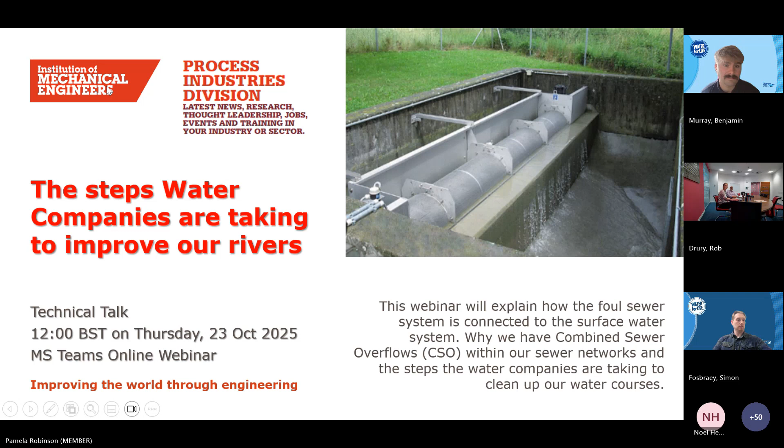Sorry, just trying to find my mouse. I'm over here now, yes. Right, there we go.

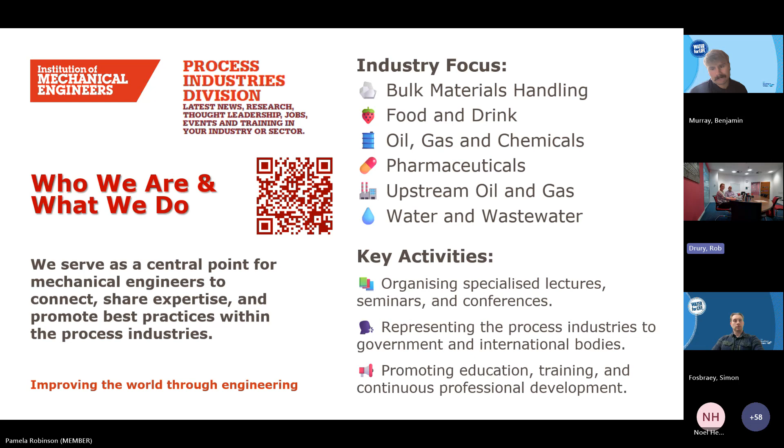I am Pamela Robinson. I'm a chartered engineer with the Institution of Mechanical Engineers. I'm a senior mechanical engineer within United Utilities. I've been here for about 3.5 years now. And with me today, I'm joined by Rob Drury, who's our Better Rivers Capital Delivery Director, also at United Utilities. Rob previously held a series of influential roles on some of the world's largest and most complex and challenging projects. Rob has worked in multiple business sectors in the construction industry, namely oil, gas and chemical, aviation, rail, pipelines and telecommunication, both in the UK and internationally. But here at UU, it's part of project investment of over £1.5 billion to be spent over 5 years, improving our CSOs.

Joining us today is also Ben Murray, who's going to do some presenting for us on storm overflows in the Southern Water region. He's been with Southern Water for the past 2 years, working in this particular area. He's driven by a strong passion for environmental protection and community engagement. Ben plays a key role in raising awareness of our efforts to reduce storm overflows. He regularly delivers information talks across the Southern Water region, helping customers to understand the vital work being done to their environment and their waterways. And then joining us later as a panel member is Simon Fosbraey, who's also from Southern Water, and he's a senior storm overflow engineer.

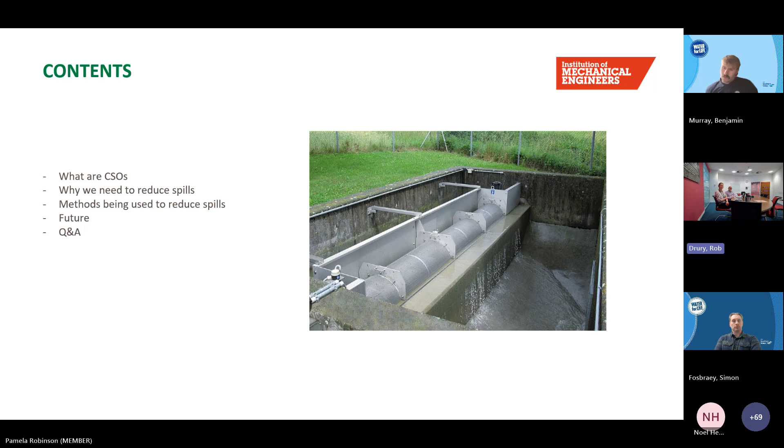Now on with the webinar itself. First of all, we're going to describe what are combined sewer overflows, CSOs for short, why we need to reduce these spills, and the methods that we're taking to try and reduce these spills. We're going to discuss the future scope that we've got, and then we'll do all Q&As at the very end.

However, we also have a lot that are cross-connected with surface water drainage, and this is fine up till a point. However, when it rains, the combined sewer only has a certain capacity. And then as it rains further, we need to have a pressure relief point, and that's what a combined sewer overflow is. It's a pressure relief point.

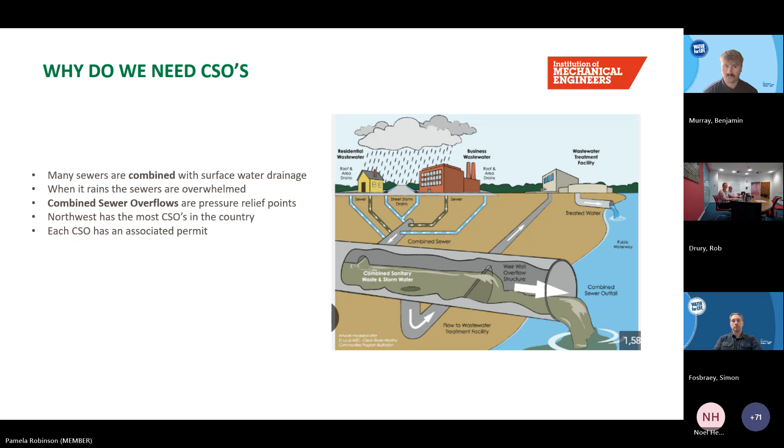If we didn't have this pressure relief point, the sewer would back up into our homes, pop manhole lids, and cause flooding for our residents and industry. We need to have this pressure relief. Each of these CSOs is a permit, an agreed permit with the EA, and it's an agreed discharge point, with most of these combined sewers.

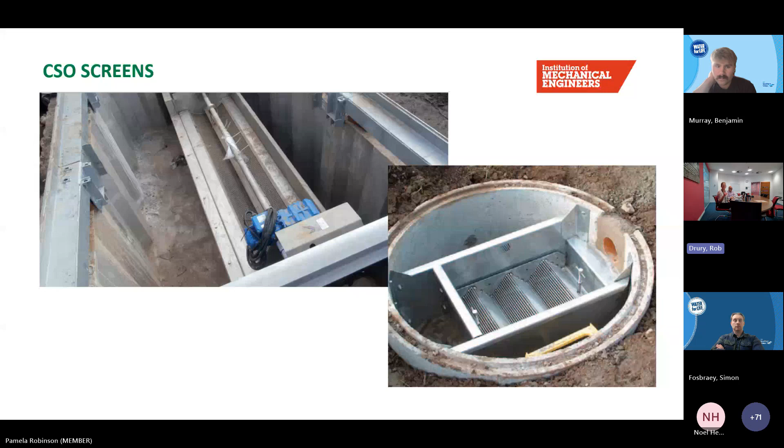Over on the left-hand side is a powered screen alternative. The flow coming through the network you can see on the right-hand side of the picture, and then as the level rises, the storm comes up through the bottom of the screen and out on the overflow on the left-hand side. That's the storm discharge. The screen has a little wiping mechanism that continually wipes it clean so it can carry on screening, and flicks the screenings back into the continuation flow, which then goes to the sewage treatment works, where the screenings are taken out.

How we're looking to reduce the spills, because we have many CSOs across the country: we're modelling all our networks to a 2050 design horizon, including climate change, to work out where we're spilling and how frequently, so we know where to prioritise and hit the highest spillers first. We're looking to get the spill events to less than 10 times per annum from that spill point.

The methods we'll try and prioritise: can we reduce surface water entering our combined sewers, so that a rain event doesn't impact our sewage pipes? We're looking at reducing infiltration of existing pipes; some are really quite old now. We're also looking to build in storage, so when there is a storm event, we hold the flow back in a tank or some kind of storage, and when there's capacity in the network, release it back in.

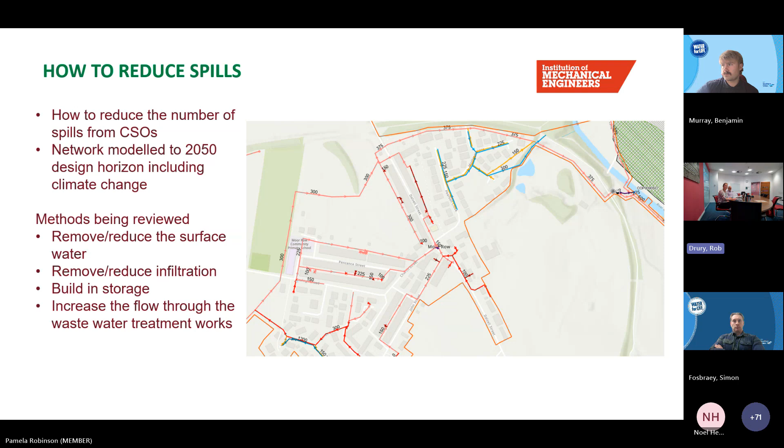Okay, afternoon everybody. I'm going to touch very briefly on various examples, some theoretical and some real life, and I'll try not to overlap with the content the guys from Southern are going to cover.

Now, that brings its own challenges of deploying at huge levels of scale. It can be done with larger premises, at large commercial premises, where again it's more successful. But generally, the rollout of this kind of thing at scale is particularly tricky, because we're talking about hundreds or thousands of customers, but again it all contributes. So the less we can get into the system, the better, and the lower volumes of water that we have to cope with within the system.

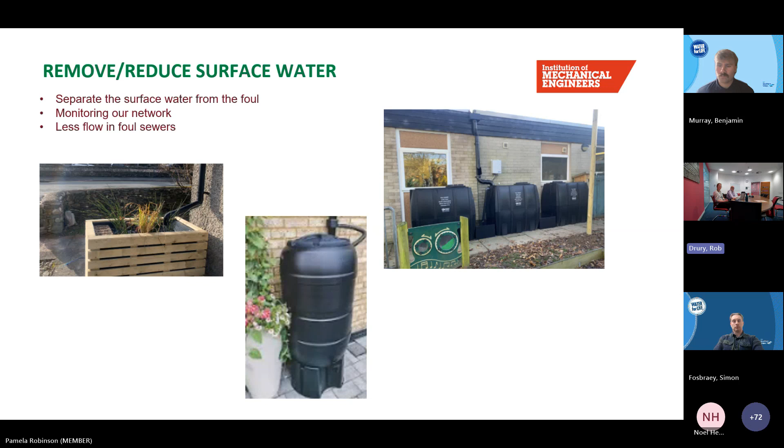And then we've got, as people like to call it, SUDS, so sustainable urban drainage systems. And again, these are real systems that you're looking at on the screen. That's in Altrincham on the left-hand side. So again, for the people that are not familiar, you think, oh, well, the local council and local community are installing tree pits and the like. And really, these are all systems that, again, prevent that rainwater getting into the system.

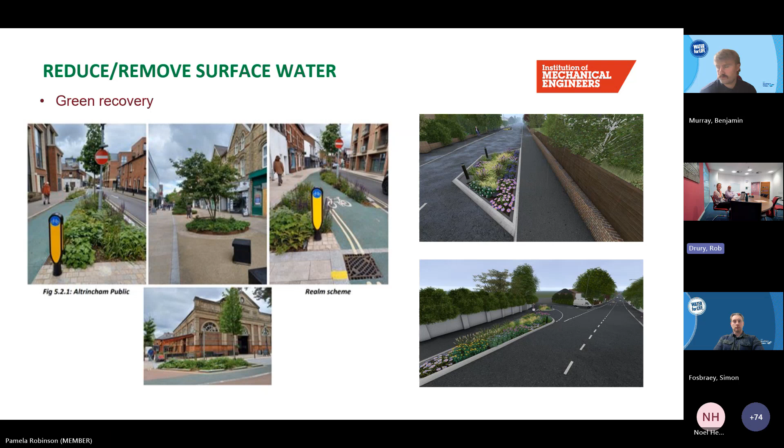These are particularly difficult to go and install because it's much easier to go and do work on some tanks in a brownfield site. As soon as you're into communities, it depends on what the community is and the appetite for traffic calming and the associated stuff. So again, difficult to get going and difficult to start, but again, very visible and a real positive in not allowing rainwater into the system.

And then this one isn't ours, but again, it gives you an idea that within these huge networks that we've got, by really automating the system, I'm going to say in probably a petrochemical kind of a way, there's an opportunity to use existing capacity within the network. So, typically we've got huge diameter pipelines that interconnect across counties and regions. And by automating the valving and the pumping and having that a little bit more sophisticated, there's opportunities to create hundreds, and in some cases thousands or 10,000 cubic meters of storage within the network.

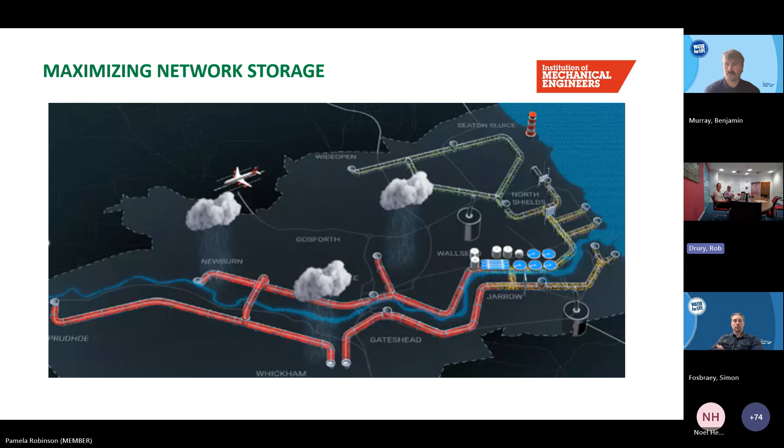So again, that's about maximising what we've already got. Almost in a sort of use Thames Tideway as an example of how that would work. But again, it's how we prevent building new and maximise the sophistication of the old.

And then we've got the here and now. So this is one of our signature projects right now. So we focus right back into more traditional construction. This is a 12,500 cubic metre tank that we're building up in the Blackburn area. And you can see the scale of the excavator in the middle there. And when all else fails and we can't prevent the ingress of water into the system or the network, and we can't fix it all with SUDS, we really are forced to go and build huge levels of storage.

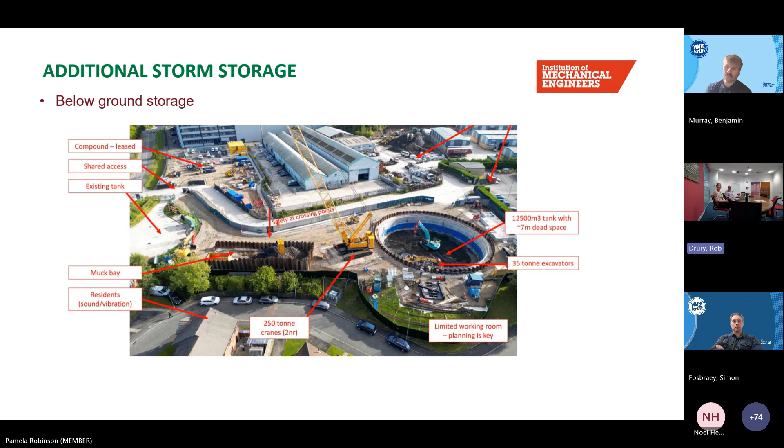This is one of our bigger systems, at 12,500 cubic meters for a tank. This is on some of the bigger sizes. We have bigger, but again, you can see. These are not typically easy to build. You would never choose where to build these. They're always in places that you wouldn't really want to build. Actually, this is probably one of the better ones. We have some incredibly constrained sites. But again, you can see the magnitude and the variance between some of the things we were looking at before and the underground shaft type arrangements that we've got.

And then we've got above ground storage, which, typically if we're looking to do work on an existing wastewater treatment plant, is often more viable because we've obviously got development rights within the actual site. Again, the visual impact and just the physicality of some of the tanks that we have, you can see the impact there.

And again, that is all about the aesthetic treatment of the site to minimise the visual impact. This is a site in Lytham, and again, it's next to an existing pumping station. It's next to a commercial site. If you look on the far right, there's a big commercial semi-industrial estate. So again, a better opportunity to go and build something that's more industrialised.

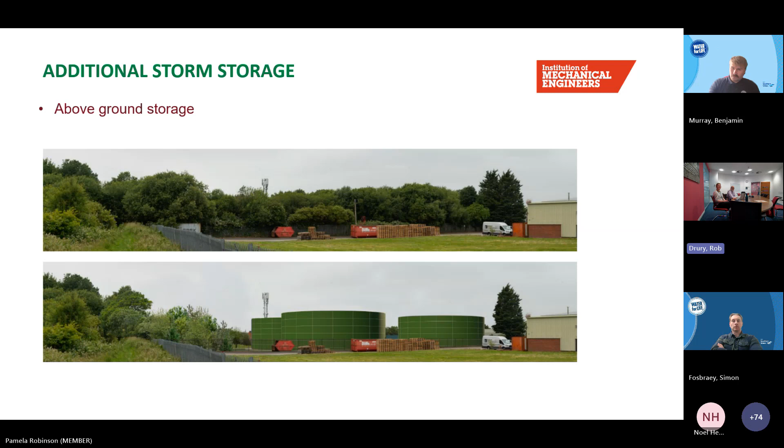And again, we have others that are right adjacent to schools and communities. So the impact of that is just not possible, and we would then be forced to go to something like what you saw on the previous slide with the underground tanks.

And then we've got a scheme that we've been talking about for a while. This was something that was badged as the Fylde Tunnel. So again, much similar to Thames Tideway; most people are familiar with that and the documentaries that exist. So rather than constructing individual sites and individual tanks and individual network enhancements, this is really about stitching together all of those sites. This was a scheme that stitched together potentially 19 CSOs and also some emergency overflows.

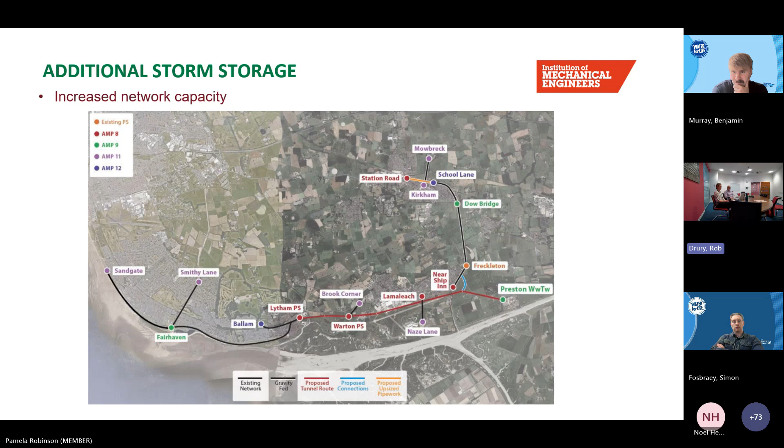So really quite an elegant solution, and we have also been thinking about the local community. The disruption is really minimal because it happens over a relatively short period of time rather than going from AMP8 on to AMP9 and 10. So the disruption is less, and the tunnelling is less because we're doing it over 3 or 4 tunnel drives rather than building lots and lots of tanks. So a much preferred option, but it can be a huge capital investment. So while this is a bit of an adventure and takes a fantastic picture, it can be an extremely expensive solution.

And then we've got another very basic one where we talk about online storage. If you think about how we upgrade sections and pipework, sometimes it's as simple as going from a 24-inch main up to a 36-inch or a 42-inch main. This is where we're utilising a culvert. In this case there was a 16-inch main that we then expanded into a culvert. We run a box culvert down an existing easement, and the easement has got a dog leg in it, so we dog leg the culvert around that as well. So it creates additional capacity within the network, and we would badge that as online storage. Very unsophisticated, but very, very effective.

We have a lot of this up in Cumbria, where there are very small areas with huge access constraints. You'd really be looking to get nothing more than a Hilux pickup on some of these roads. So getting plant, equipment and materials is a real constraint. Building it becomes the easy bit; getting to the site and the access is probably the real challenge.

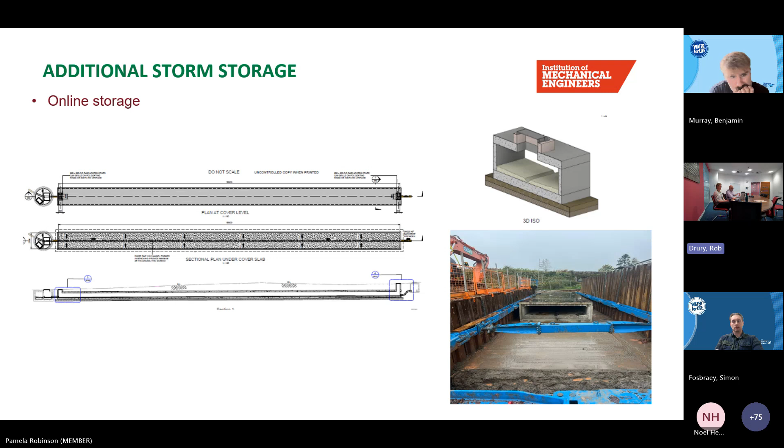And then we've got increasing the capacity. Where we have situations where it's all about balancing the best possible scheme, sometimes it's easier to increase the capacity of the existing treatment plant. We've done this particularly for low capacity sites. These are modular pieces of equipment, basically a modular treatment plant, a side stream treatment plant as it's called. That takes what might be a 5 litre per second facility, and we can add another 5 litres per second, so we can maybe double the capacity of the treatment plant to deal with all flow. It doesn't provide storage, but it treats more.

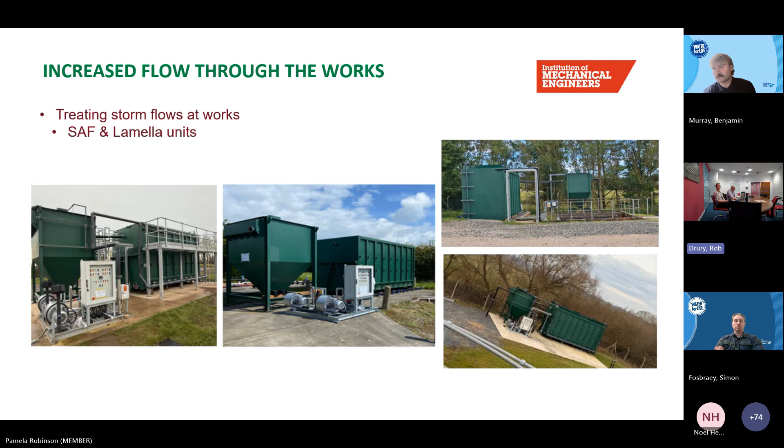These are particularly useful in the areas of Cumbria, where we have lots and lots of very small sites with very low flows in very spread out communities. It's just not viable in the centre of Manchester and the like, because the flows are huge. So this is particularly tailored to low flows, and from a rapid deployment perspective it has been quite a speedy and successful solution.

And then we've got wetlands. We have examples of this, where we're able to be very, very green, something that we would prefer to do more of. There are discussions with the EA and Ofwat about how this becomes a much bigger deal, probably later in AMP8, but certainly in AMP9, which will be 2030 onwards.

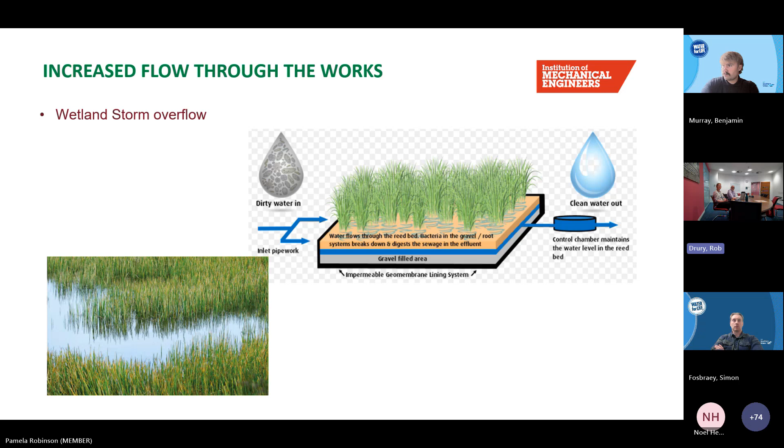So again, rather than going through process and going through huge levels of storage, we're able to go through a green level of treatment before we put the treated water back through into the water courses. So again, what we've got there is all these different combinations of solution that really, I'm not saying it's a lottery, because it's not, but it's about picking the right solution that is typically about the area, the geography, the topography, the capacity, and again, what's most economically viable.

And then I think this has got a whole load of things on, so I'll push all the buttons. And this one is one of our bigger sites. And again, I think this is quite interesting, because whilst it's already a big treatment works, there's opportunities here to, one, increase the capacity of the works. So again, we're talking about additional treatment. Two, additional storage. So we will have large scale, tens of thousands of cubic meters of above ground storage.

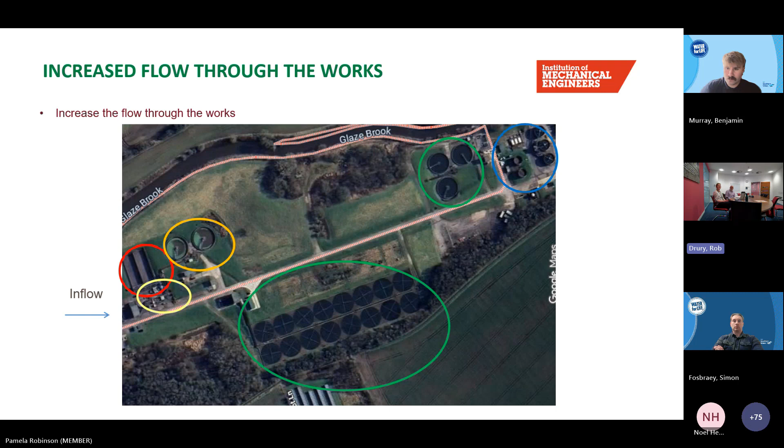But also what we'll be doing is we'll be linking in other overflows. So much like the tunnel solution, as I mentioned before, this will also link in probably 3 other overflows. So we've got a network solution that links in 3 other overflows, a level of network upgrade and upsizing to give us network storage, some additional treatment capacity on the site, and also storage on the site. So this plays, if you like, with 3 or 4 of those potential solutions to give us an overall build, which is one of our bigger CSO schemes.

And then I think I just put this in just to wrap up, just to give you maybe the magnitude of this. So, whilst some of those schemes don't look that significant, we have over 400 of the overflows that we're dealing with in the next 4.5 years. We are structured regionally and sub-regionally and locally. It's a plan for the overall portfolio of work, but it is very regionalised. Different things matter, and different things are more important in different areas. We have obviously a large coastline, so we've got bathing water restrictions and higher levels of criteria that we need to satisfy.

We are desperately running very, very quickly to modularise and standardise solutions. So we have standard designs, standard solutions. You saw some of the modular equipment that we've sort of developed, reverse engineered some stuff. So modern methods of construction, DFMA, where we really want to plug and play a lot of this where we can. Building large storage tanks in a bespoke way isn't really the future. It's not really where we want to be. So again, it's fitting those design modules and solutions together. Because of the 400, obviously we have to go quick, and we're going quicker than we've ever gone before.

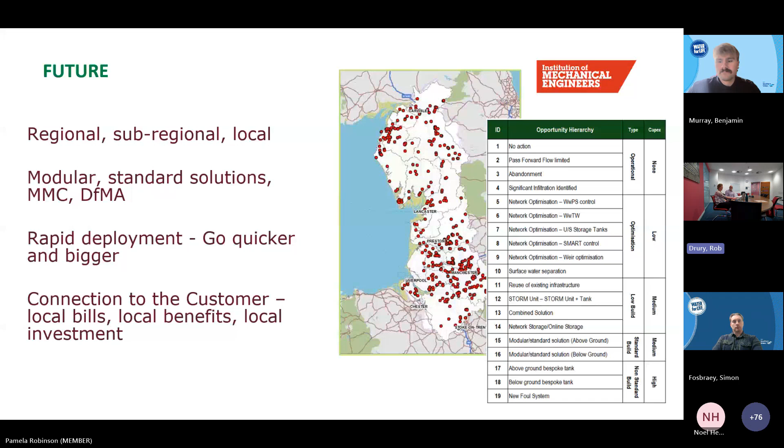So that just gives you a quick snapshot on what we're doing, the scale of the problem, and then I'll hand over to the guys at Southern, who I think have got some specific details that will hopefully play to that. Okay.

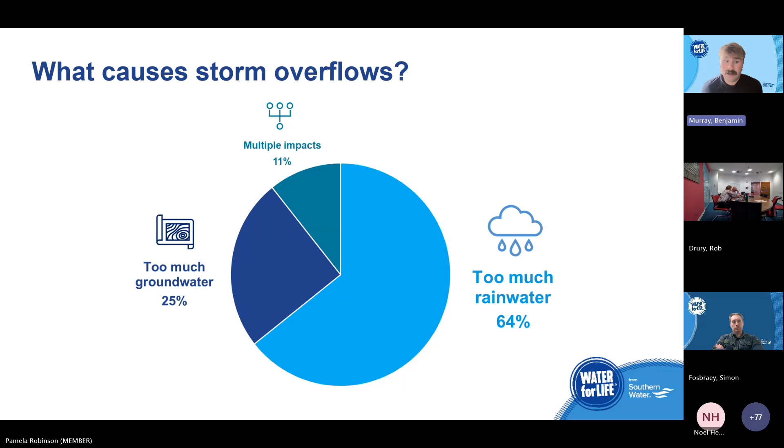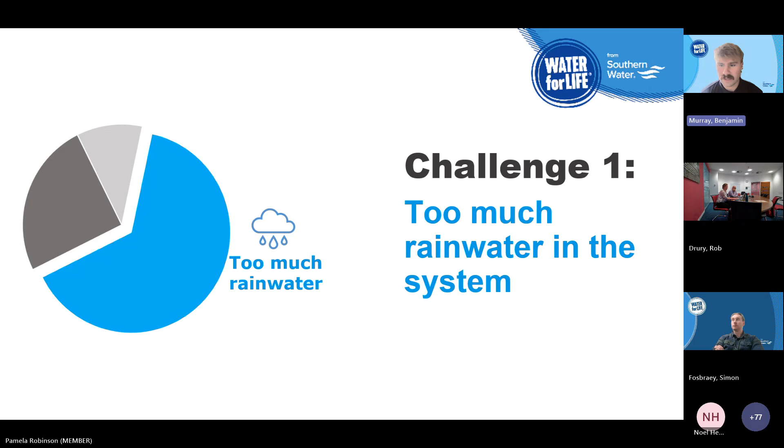So we're going to be focusing on the first point, which is locking out surface water and rainwater. So we're going to go on to the next slide there. The main focus of what we're trying to do here is we've been able to look at 5 different steps that contribute towards locking out surface water and rainwater from our network. I think I'm still seeing the previous slide. If we can go on to the next one, that would be good.

Yeah, so we break down here into 5 different steps. So the first one, optimizing infrastructure, tackling surface water connections into our sewer network, installing sustainable drainage systems on homes, that's our slow drain water butts, installing sustainable drainage systems on businesses and community buildings, that's our rain planters, and then working on highway schemes with the local councils. So next slide, please.

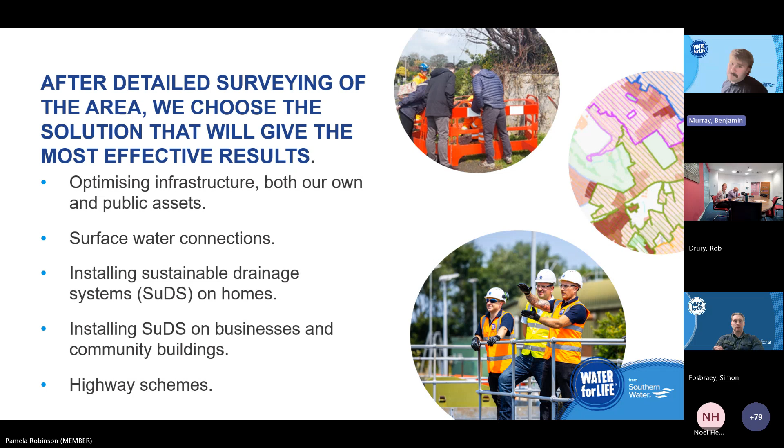So if we look at that first example there, looking at optimization, the example we've got here is where we worked at our Swalecliffe wastewater treatment site up in North Kent. We were able to change and challenge the permit from when we first began to utilise the storm tanks on site. So the full flow to treatment, which is the maximum amount of flow that site can treat at any point, is 205 litres a second.

Now, it used to be that the storm tanks, the first 2 storm tanks, would only start activating once the flow coming into site reached 760 litres a second. We were able to challenge that permit and make sure that we actually begin utilising those storm tanks right at the start. Once that full flow to treatment has reached that 205 litres a second, that's then allowed us to save on storm overflows by 36% at our treatment works. Next slide, please.

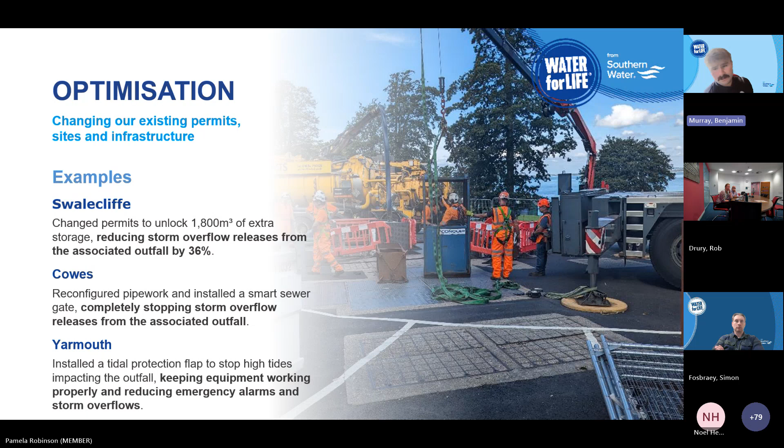So moving on to the next point, fixing surface water connections. So the example we've got here is where we worked down in Portsmouth, on a street called Old Turnpike Road. What we found is that the surface water that was coming from the houses should have been going into the surface water line that was in the road. Now, obviously, as we know, a lot of the network is combined. But we do have some parts of the network that are also separate, where you have your own surface water line and a foul line.

What we found here was these houses, their roof drainage, instead of going to the surface water line that was already in the road, it had been incorrectly plumbed into the foul line. So when it was raining and raining heavy, all of that surface water and rainwater was going all the way down to our wastewater treatment works. So we were able to separate the roof drainage from 34 properties, which has then helped us to lock out that surface water from going to our treatment works.

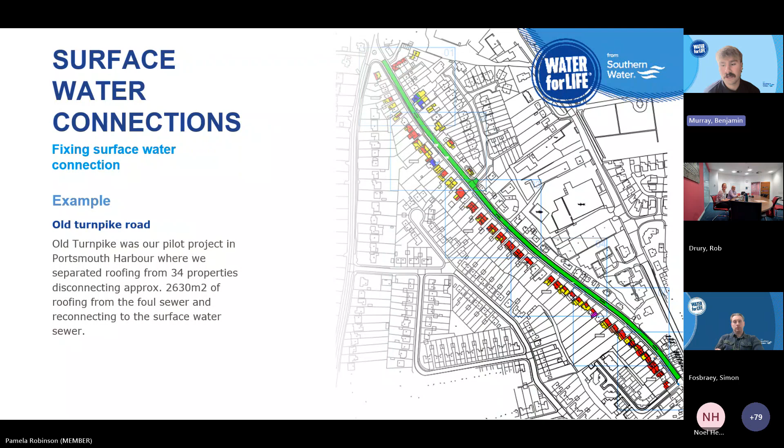So we liaise with those households, we engage with them, and then they work with us to allow us to redirect their roof drainage back into the surface water line that it should have been going down in the first place. Next slide, please.

The top half will slowly drain away over a period of about 6 hours. Yes, it will go into the combined network, but we're slowing the flow of that surface water from going into the combined network. How is that helpful?

If we can flatten that heavy peak of rainfall, that's going to reduce the impact on our wastewater treatment works going forwards. Because that water butt is slowly draining away over a period of 6 hours, it then means that we regain that capacity for when it comes to rain again. So instead of it just being sat there full, especially in the winter months, it's allowed to drain so we can regain that capacity.

Now, I know that Rob mentioned earlier that in isolation, how useful is installing a slow drain water butt? Well, yeah, it may be more of a token effort, but en masse, it can be useful. And we found that installing these slow drain water butts in the Isle of Wight, we worked in a small town called Havenstreet, and we installed 130 of these slow drain water butts. That helped us to reduce spills at the local pumping station by 70%. So it was very effective for us in that Pathfinder area. And it can be a solution where some of the other things that we're looking to implement might not be a specific option. Moving on to the next slide.

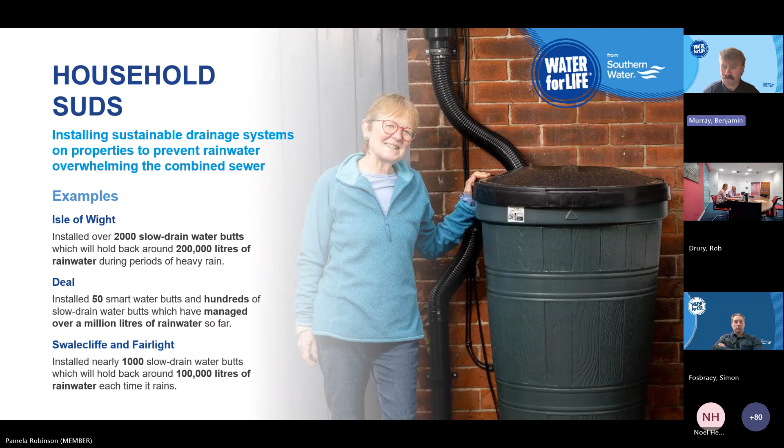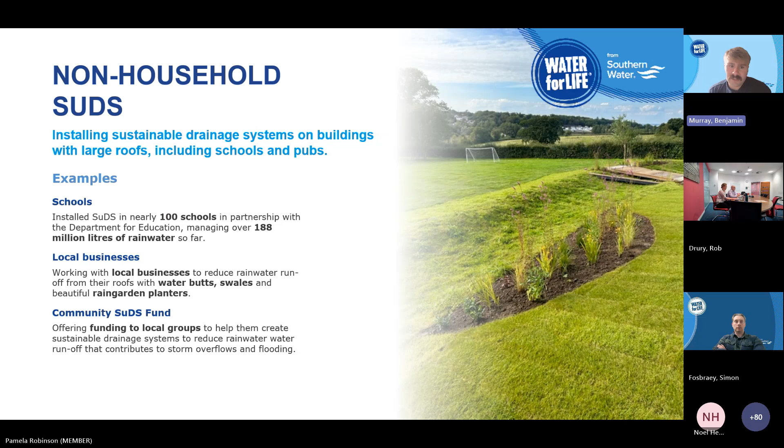And we didn't just stop there. We made sure to go in and actually explain to the children and educate them on why a rain planter is useful at their school. What are the different benefits? Just to get them thinking, just to get them understanding, and it proved to be beneficial. They can go back, they can tell their parents, why is it useful that we have this? What are storm overflows? How do they work? What are some of the other issues associated with flooding? So really, really useful. And yeah, it's been a very successful scheme, that one for us. Next slide, please.

And then our final solution to blocking out surface water and rainwater is working on highway schemes. So again, I know Rob showed a few examples earlier on. We've got similar examples of where we're working with local councils around the Southern Water area. So we've currently got 3 highway SuDS leads that work within the Clean Rivers and Seas Task Force. They're split east, central, and west across the Southern Water region. Their jobs are to liaise with the local councils and to work on trying to find synergies where we can collaborate with the councils to install sustainable drainage systems. Yes, that's going to help us with reducing storm overflows. It's going to help us to reduce runoff into the combined network, but it's also going to help the councils reach their own targets.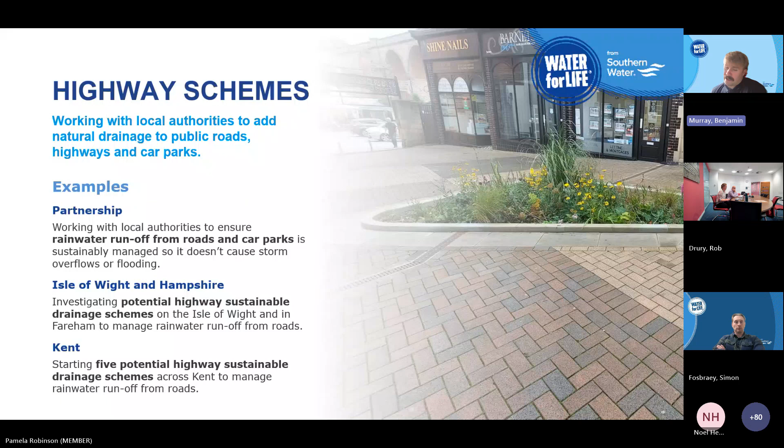So by doing this work, some of the things that we're looking to implement are things like swales, things like tree pits. What's a swale? It's like a green area that sits off the side of the road. That surface water runoff can go into the swale and naturally permeate out into the environment. It will also provide a natural form of treatment as well. And then tree pits work in a bit of a different way. They have a basin that sits underneath the tree. That will then fill up. And then there's a small slow drain pipe that allows it to slowly reintroduce back into the network. Again, we're slowing the flow of that surface water. So some really good work going on there. Next slide, please.

And then we now move on to the second challenge that we experience in parts of our catchment at Southern Water, which is locking out groundwater infiltration from the network. So if we go on to the next slide.

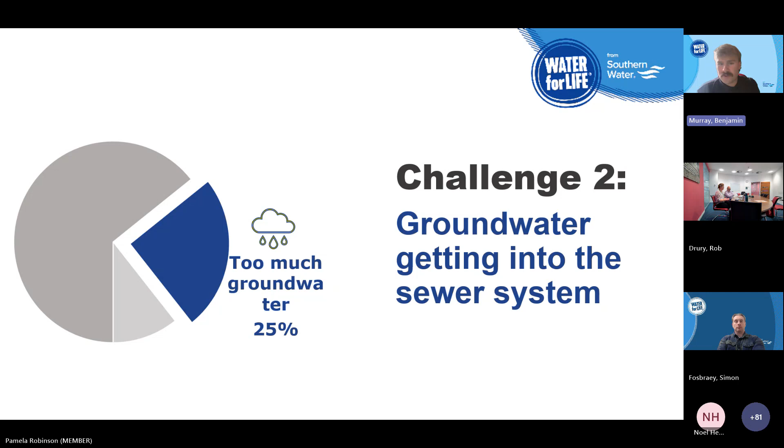So how does groundwater actually get into parts of our catchment? Well, it's important to recognise that this isn't an issue across the entire catchment. It's only some areas that will suffer with groundwater infiltration. And that's because the rock that the ground sits on in some areas can be impermeable. And what that means is the groundwater level will sit a lot higher. When it sits higher, that pressure from the groundwater in some cases will then find its way in through gaps in the joints of the pipe.

So you can see on the picture here, that water that's coming into the sewer, that's groundwater. And the sewer there is perfectly healthy, but it's just that pressure is finding its way in through the joints in the pipe. That's obviously not helpful for us because then we've got a constant stream of groundwater going to our wastewater treatment works that we're then having to treat that we otherwise wouldn't need to be.

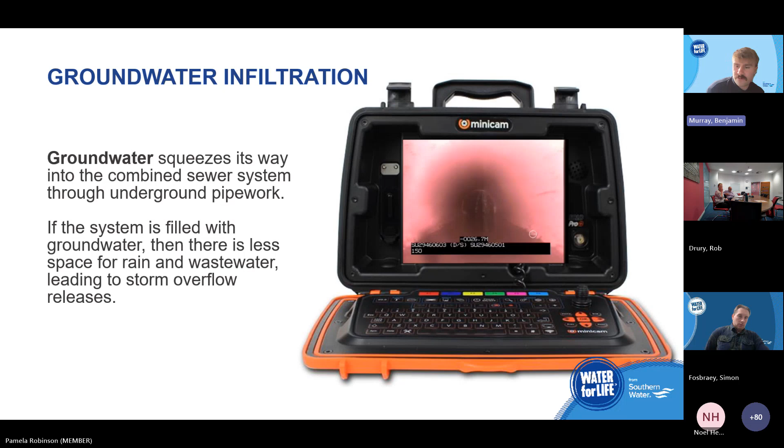So if we move on to the next slide, we'll be able to tell you about a specific example and then what we were able to do to lock out that groundwater. So what did we do, and where was the first case of where we were able to lock out this groundwater and solve this problem? Well, we worked in a small area called the Pan Parishes, so it's made up of 3 small villages: Kimpton, Thruxton, Fyfield, near Andover area.

We were able to implement a no-dig solution that allowed us to put a packer down into the sewer, and we'd have a fiberglass and a resin material that goes around that packer. You insert it into the sewer, you inflate it, and then it will stick to the walls of the sewer. You allow it to dry for 45 minutes, and then you can remove the packer. So you don't actually need to dig up the pipes to line the sewers. Yeah, it takes up a really small amount of the sewer.

What did that mean? In the Pan Parishes, we used to have 30 tankers a day going into those 3 small villages, removing excess groundwater from the sewers. Obviously with 30 tankers a day, very disruptive, a lot of traffic, a lot of noise, unhappy residents, a lot of cost. Through lining both the public and private network, 4.5 kilometers of it, despite having near record-breaking groundwater levels, we've now not had any tankers back in the area since. Really, really powerful case study for us.

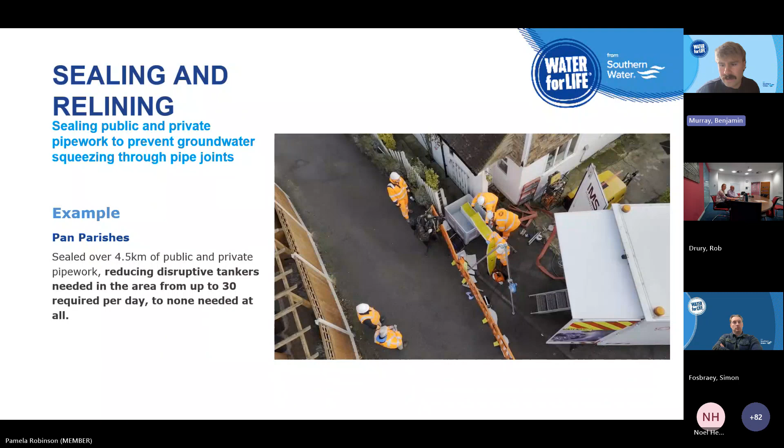And now this is paving the way for doing more of that, locking out groundwater in some of the other catchments that suffer with that same issue. So a really powerful catchment, and it's now paved the way for what we're going to be doing going forwards. I think that's the last slide from me.

Excellent. Cool. So I'll probably hand back over to yourself, Pamela and Rob. Sorry, we're just finding the mute button. So thank you very much for that, Ben. And thank you for giving an insight of what's happening down in Southern Water as well. Now let's just move on to the questions. If we start. Oh, yeah.

So, the better the intelligence that we've got and being able to go back into those networks to disconnect those, but they've also got to be disconnected in the right way, without creating other problems. So again, the flooding issue that may result from that is a particular issue. But generally, yes, it is an issue. Yes, it is something that we can benefit from from a spill reduction perspective.